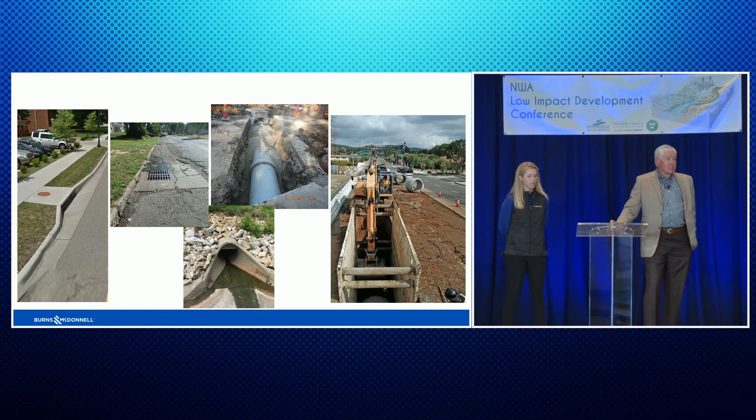Okay, so I'm going to start here with a pictorial tour. Sometimes a lot of our stormwater infrastructure is out of sight and out of mind. This is what we're all talking about - we have a lot of stormwater infrastructure out there, a lot of it out of sight, a lot of it large pipe. Unfortunately, a lot of that large pipe could be corrugated metal pipe that's decaying. There's a lot of infrastructure in the ground in our cities across the country related to stormwater. We also have open channels or streams.

So that's, to me, a really stark difference in how we've invested in some of these neighborhoods - completely different when we look at stormwater management. As we look for the next generation, I know in many of the cities I'm working in, including Kansas City, environmental justice - where we're investing in stormwater - is a real driver for community reinvestment. These are things we need to think about for the next generation.

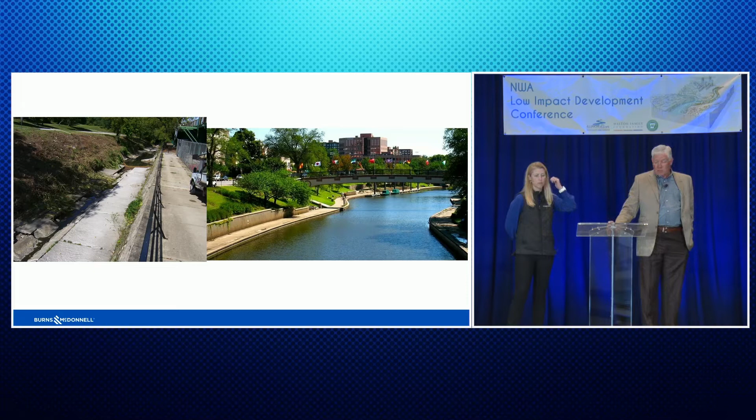And the thing here too, what value, once again, are we getting out of that? If we're going to have the expense of putting in a double box and Mother Nature wants to put it back and sediment in, what's the value again 20 years later? How can we maintain that value for a longer period?

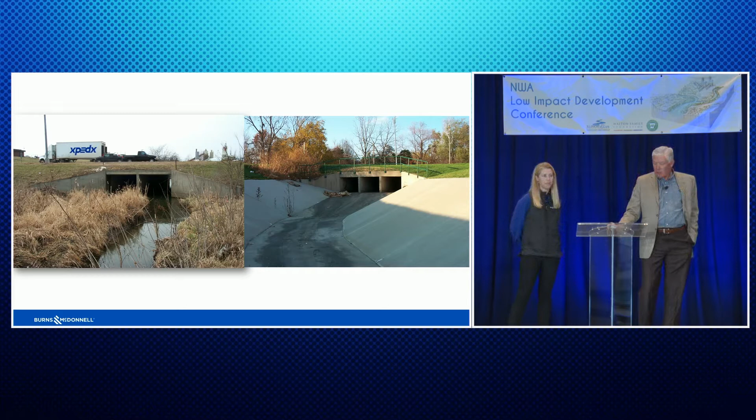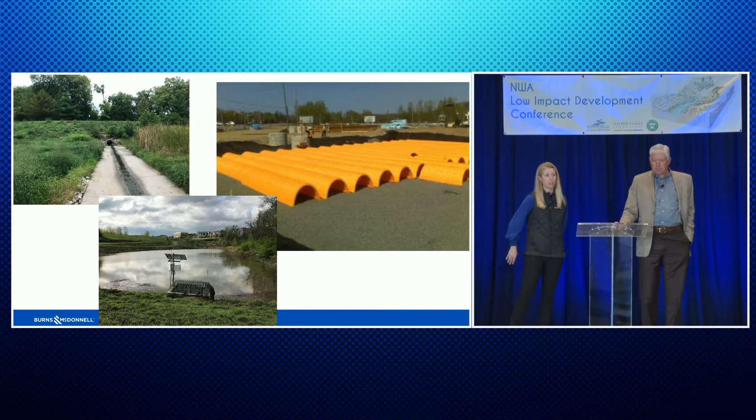So are we keeping track of these systems? Do we know where they're at? I think that's going to be very important as they are going to be critical pieces in our redevelopment over time, where there's not space to do larger stormwater management practices.

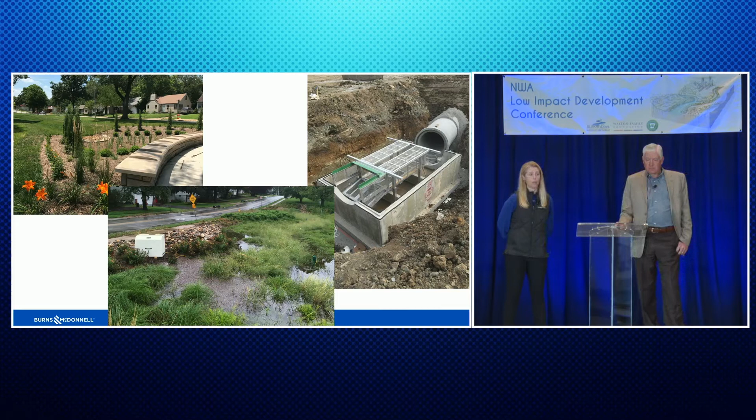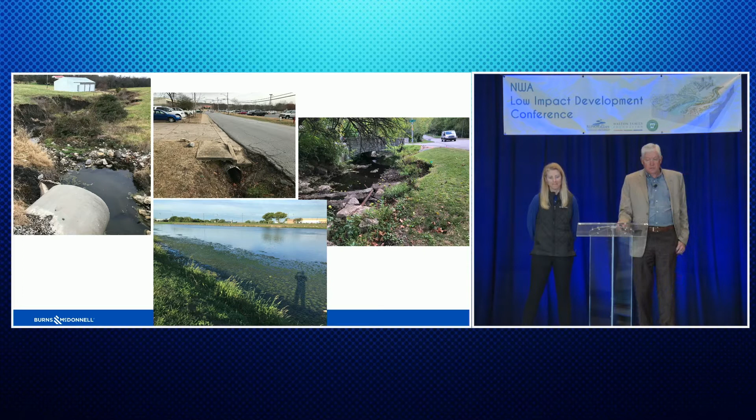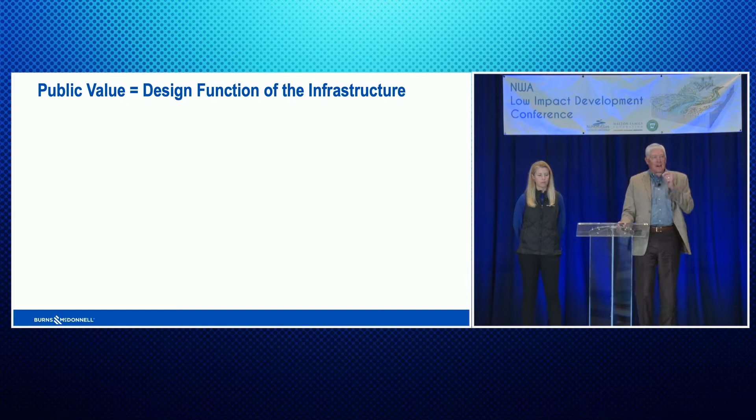What I want to talk about now, you just have that visual of all this infrastructure that's out there, what I want to challenge us with now is, what's that value, what's that function we're providing to the public? Well, coming out of World War II in the 50s and 60s, what did stormwater infrastructure need to do? What was the value we were putting on it?

It was conveyance, right? If anybody's taken an open channel hydraulics class, it's a trapezoid channel. If we put concrete in it, we lower the Manning's n, we can get a very efficient channel. We did a lot of this type of work in the 60s and 70s. That's the main function. Then we started to get into things where we wanted to store it. We wanted to have more retention, detention. So we provided detention ponds, retention ponds. That's a value, right, we're putting on that.

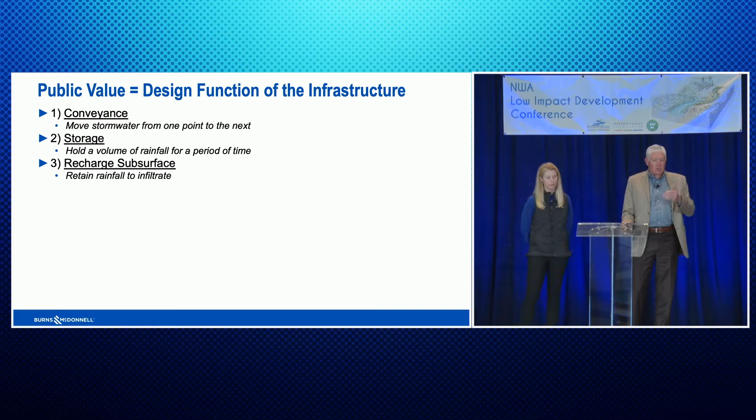And then in some cases we started to do more recharge type subsurface, retain the water long enough so we can infiltrate and those types of things. So we're trying to build, we're adding more value, right? But if we start to think about then, you begin our NPDES programs, now we're doing stormwater treatment. So once again, we're building that value. But I would also say there's other things we can do. The Walmart example is a great example. Can we reuse that water, retain that water for reuse for irrigation?

I mentioned the city of Lenexa, Kansas did a rain-to-recreation project. What they were trying to do is link that to what recreational value can I get out of my stormwater management. But then if we really get outside of our box, what are other multiple functions?

Can your parking lot be a stormwater management facility? Can your street? There's some vendors out there we've worked with that, with different pervious pavements, we can start to make a street a stormwater management facility, right? I mean, these are out-of-the-box ideas, but we're adding value to all these, right?

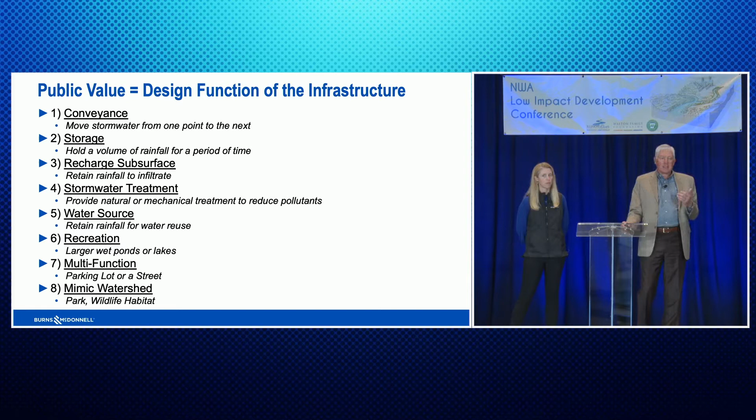And then finally, that mimic, we had a great tour yesterday afternoon. And to me, that is getting back to how can we mimic Mother Nature, make it a watershed, wildlife habitat, all those things. But as we go down this list, can your stormwater management in the future do all these things? That's where we get that increased value, right?

So I was flipping through a journal, and my kids make fun of me because I'm kind of a nerdy person, looking at how we can explain things differently. And I came across just a basic economic little study, and they said, well, this value statement, right? So cost is on the y-axis and value is on the x-axis. And what they talked about in this article is you can divide this basically into 4 quadrants, right?

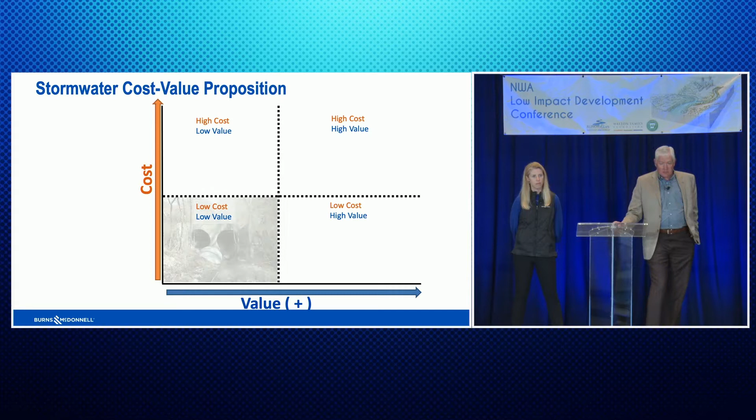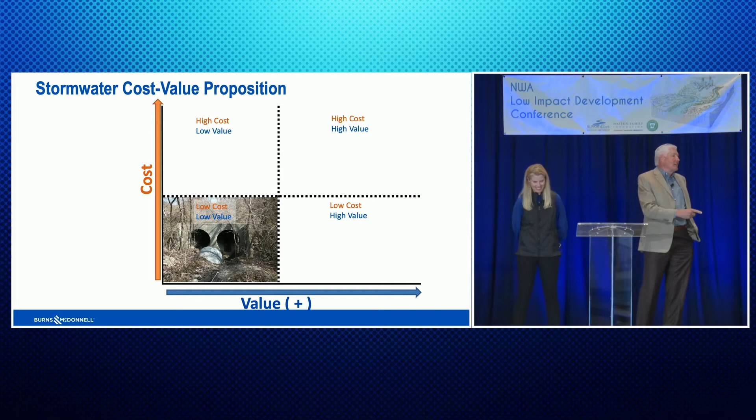And so any type of infrastructure, any type of improvement you're doing, you have these 4 quadrants that you can fall in, right? We can have low cost, low value. What does that look like in stormwater? I see a lot of this out there, right? Hodgepodge of, we do the lowest cost thing we can do, and I got a city engineer sitting over here, and those are things that just happen, right? You have a certain budget, this is what I can get in to help solve the problem.

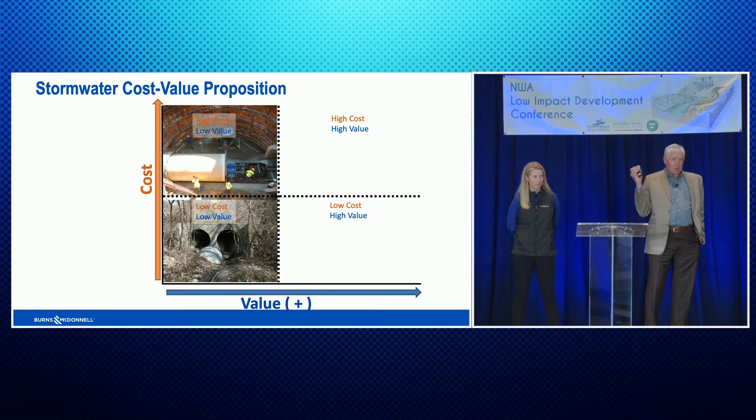By the way, this is also an over $1 million change order and the shoring it took to be able to get the construction workers down in that hole. High cost, very limited value, right? We're just conveying water underneath an existing street.

But then we look over here with a lower cost, high value. At happy hour yesterday, I talked a little bit about this at my table. This is a small town in Missouri, Fulton, Missouri, where the city administrator said there's no way to solve this problem. It was too expensive. And I said to Bill, why do we only have to convey it? You own this parking lot. This is a picture of a parking lot.

We use our tanks, plastic tanks. He has 2.5 acres of impervious area that was draining out to the street, and he only had an 18-inch pipe. He thought he needed to make a bigger pipe. I said, why don't we take your parking lot and put it into your stormwater management, and we use pervious pavement on top of it, which he didn't believe would work, so he tried to go out and flood it with 2 fire trucks. Couldn't flood it, by the way.

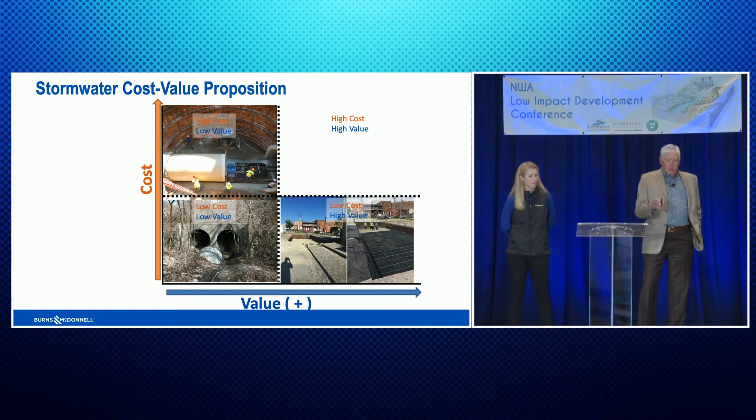But anyway, they did this with city crews, and this was a $32,000 solution. That was the material cost. Of course, with the city labor, it was more than that. It took the city crews about 2 weeks to do this project. But a $32,000 cost to him, because he already had the labor, and we solved the problem. So that's a lower cost, higher value, right?

And then finally, what we saw out here last night, what Brenda and I have been working on in some of these projects, how can we get that? It's a little bit higher cost, but it's a much higher value. Now here's the thing that I see in stormwater that we all have to admit to: some of the things we've done since the 70s actually have a very negative value to the public.

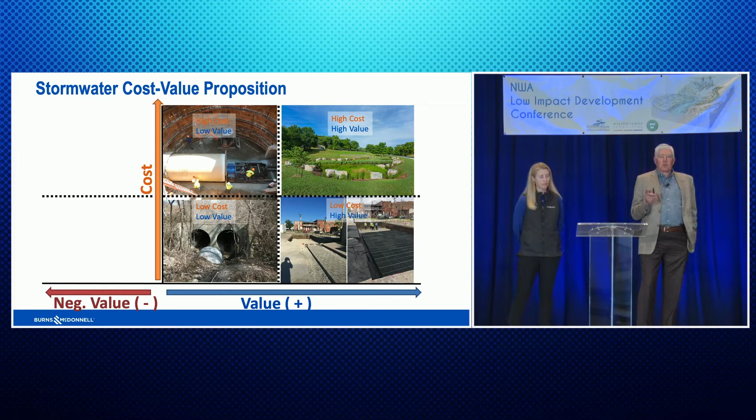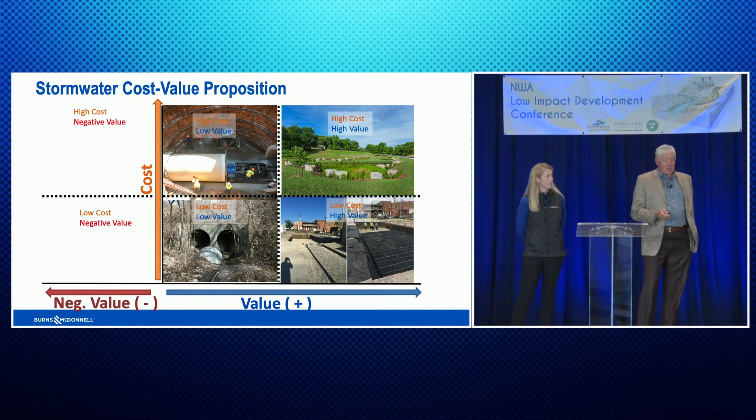And I think when you think about some of the areas in the Illinois River watershed, these are some of the things that you see out there, right? We actually have these low-cost items that are causing a negative value, unfortunately. I showed this picture the other day where a simple extension of a large culvert has ripped this stream apart. Or the high-cost negative value is some of our enclosed systems now that we've connected more impervious area to the top end of them.

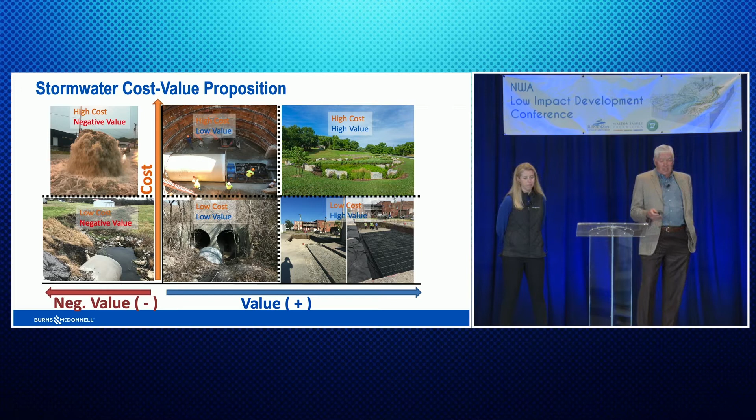Actually, this is in Kansas City, Missouri again, during a 2-inch rainstorm where you're actually getting basically a geyser because you have this large enclosed system, a very high negative value, but a very high cost, right? So with that, what are we trying to do? We don't want to do those things.

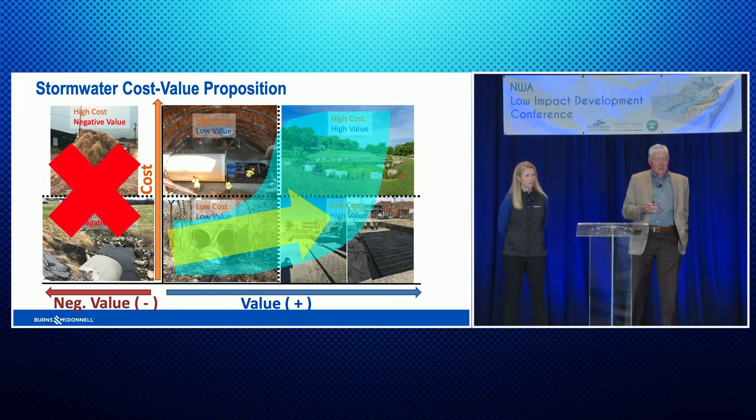What we're trying to do is move ourselves along this curve, right? How do we get from here over to there? That's really what my challenge is for you guys here today. That's the next generation. That's where we want to get to. It's not going to be easy, but we want to get to things that have that higher value. And so we'll talk a little bit how we get there in these next slides.

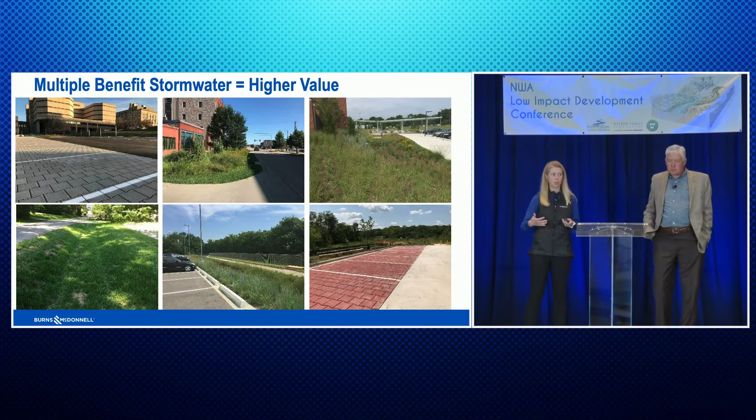Yeah, so looking for opportunities to, again, create that balance. And we started to talk about that yesterday, too. Where are there opportunities where we can layer in stormwater management to other things we want to do on the site? And I think it was Carol had asked, how do we start to make some of these changes? And I think it's really in the way we start to look at a site. So it's designing together as an interdisciplinary team versus in each one of our silos.

So are there opportunities where we can start to increase the value of our existing detention basins? And I know that's a lot of the feedback that I've heard from this group when we've gathered is we have a lot of detention basins that aren't working. Is there a way we can get them working better? Maybe it's retrofitting them with a new outlet structure that controls a range of storm events. Or we're going to talk a little bit about what if we start to automate some of that control?

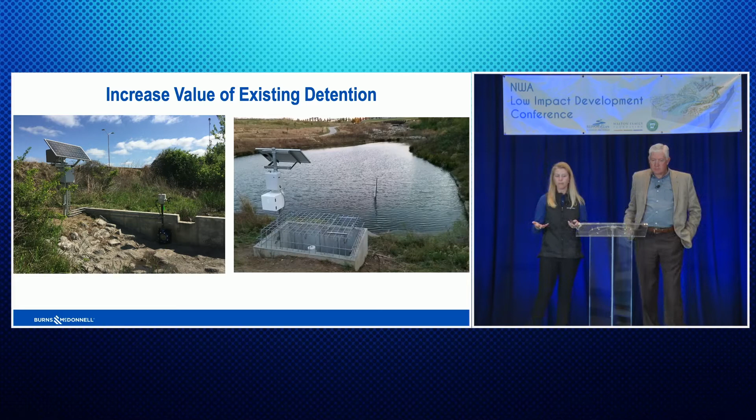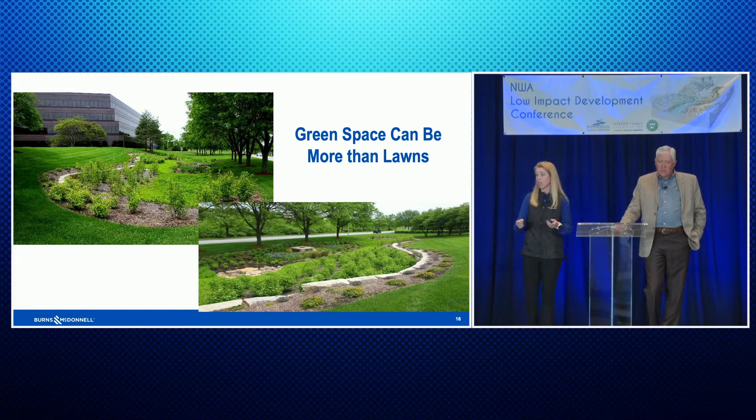We heard a lot about this yesterday, where pipes are being constructed to bypass a lawn area or bypass green space. Are there opportunities where our green space can be more than lawns? And looking for those opportunities even as a retrofit scenario. Collection being more than inlets. I thought it was great to hear that being applied in the Walmart project example that we heard about this morning. So many opportunities to collect stormwater in different ways and have vegetation that uses that stormwater.

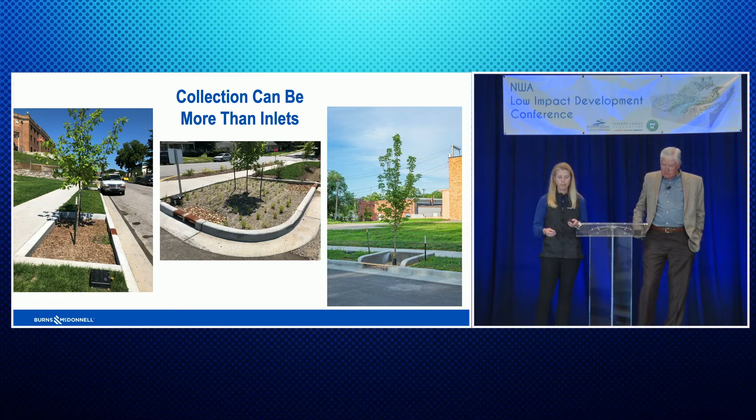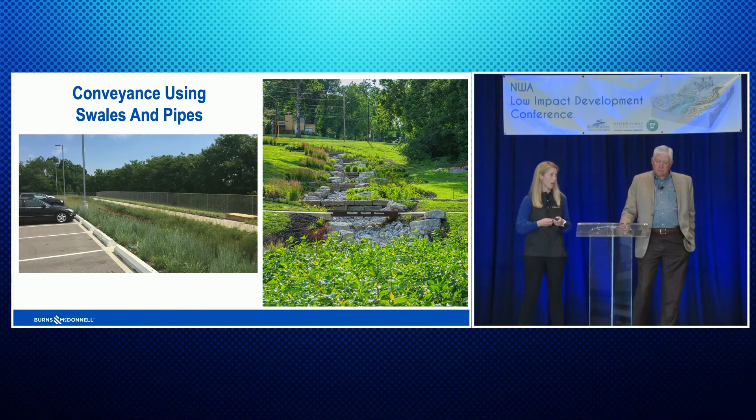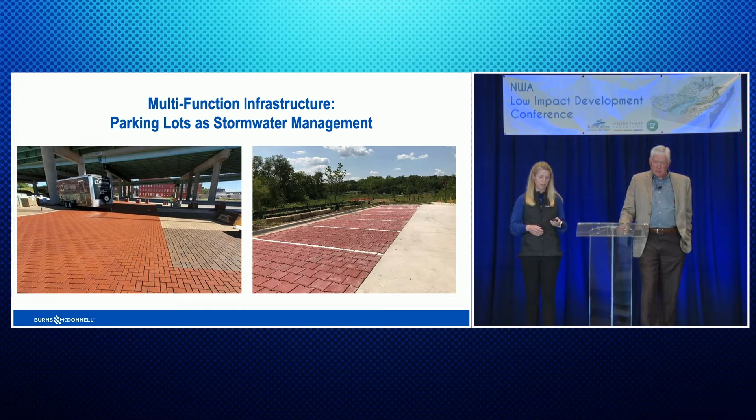Parking lots, lots of opportunities here, whether it's building in median areas or using the parking spaces themselves, depending on the area you're in. This can be ways to reduce your impervious area, or you can build storage underneath it potentially. And a lot of different materials you can use on the surface. A lot of different products out there. Concrete and asphalt are also options as well. So a multitude of options there. That can also be applied to driveway settings too.

So you'll see an application on the right where a product was used that also is providing storage underneath in a very highly impervious setting. This is also in a very highly trafficked area where they're bringing in deliveries, trash trucks. Also, it's a juvenile center, so there's a lot of traffic in and out for inmates.

Do you want to talk any about the? I think I already covered that.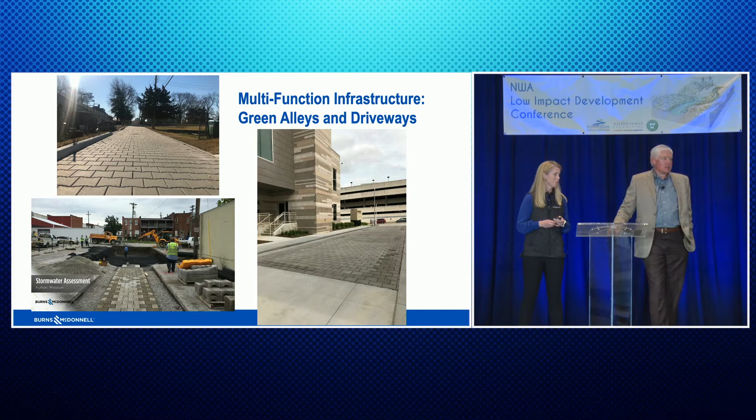Okay. The only thing I'll say about pervious pavements too, we've talked a lot about maintenance, is we've been doing monitoring of pervious pavements, and some of these do degrade pretty quickly on the infiltration rates. So like anything, I think we need to also be prepared that these types of facilities do need maintenance. You do need to vac these out typically to restore that infiltration capacity. So they're not just install them and walk away for 15 years. You're going to have to maintain these facilities to make them function.

The final couple here are projects that Brenda and I get excited about, and you guys in the audience get excited about too, is how do we take some of these larger open spaces, these parks that may not be fully utilized, and turn them into something that has that higher multiple value, multiple function to the public. This was a park that was severely underused, and bringing the public back to it with trails and making it an experience, not just a monoculture of open lawn that wasn't being used for really anything except being mowed.

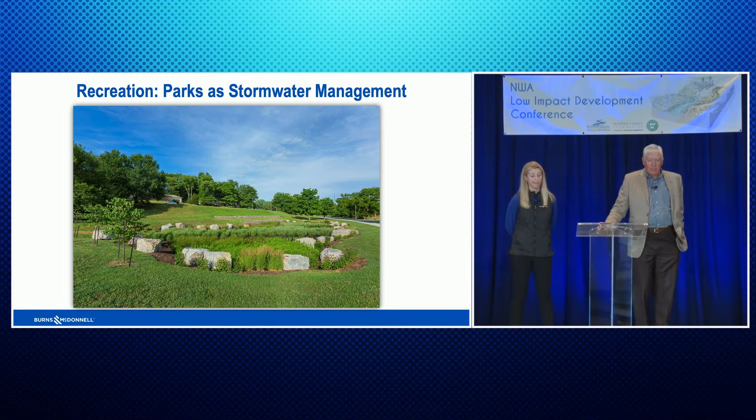The final one is in Omaha, Nebraska - North Omaha. This was a large park area. When I first looked at it, there were 3 baseball fields here, and I thought the parks director would never want to do this, but they actually had a master plan with the community around it, and the community wanted a larger park setting similar to what we have out here. This is a 5-acre wetland complex that also provides 100-year flood protection for the downstream community that was in the 100-year floodplain. So there are opportunities in these highly urbanized areas - this is just north of downtown Omaha. There are areas out there that we can find these opportunities to stack those benefits and increase the value of our stormwater management systems.

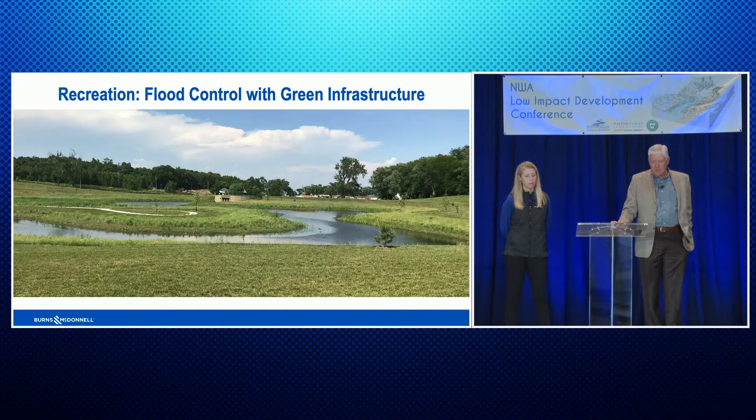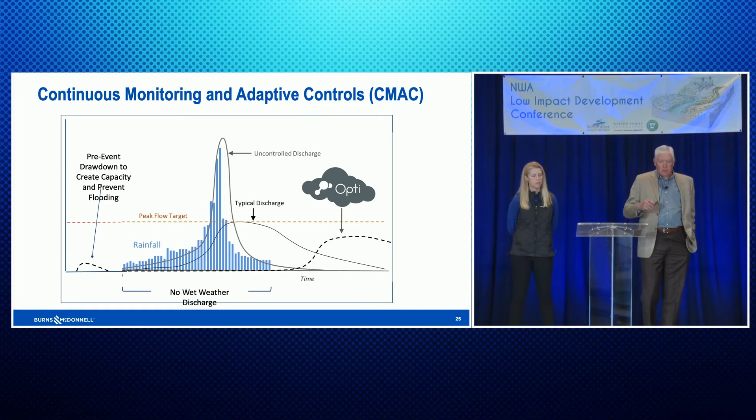So let's talk a little bit about some smarter solutions. Since it was mentioned this morning by Ted, this is RTC out of Boston, a really interesting company that's using cloud-based technology and the NOAA forecasting to, in real time, open and close a valve. It's trying to predict in real time, every couple minutes, what the NOAA forecast is going to do, and then it's going to open and control a valve so that we can maximize the retention in these existing facilities.

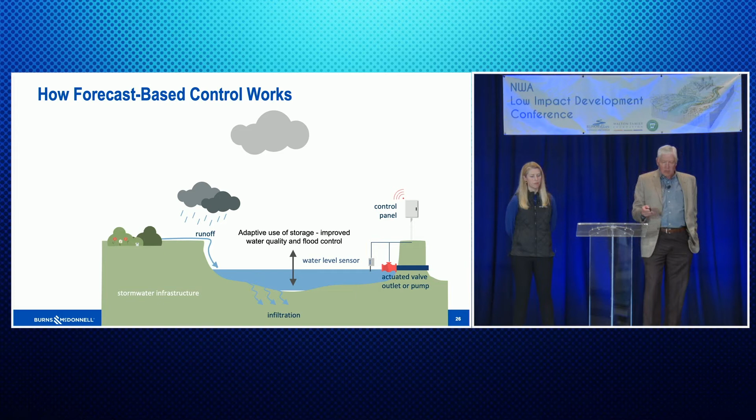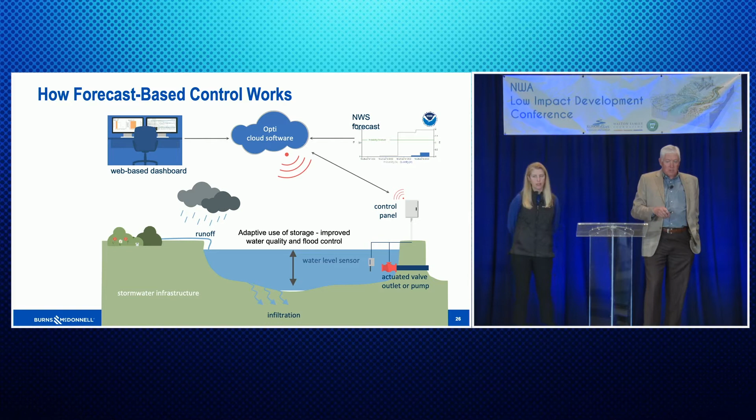Here it is pictorially, showing what it's doing. In a typical wet pond, you get runoff, and the pipe leading out of it would, after the rain stops, drain the water down to where the pipe invert's at. So it's a passive system - it just drains out based on the hydraulics of the pipe. But what if we went in there and put a valve on that pipe, with controls to that valve, and then monitored the water level in the pond so we know how much volume we have, and also monitor the rain forecast? This is what Opti basically provides in the cloud - it's automatic. There's no operator here except the computer, which has logic to it that you enter based on the NOAA weather forecast, and it operates that valve. So it keeps that valve closed now because it knows the rain event's over, and I can maximize my retention.

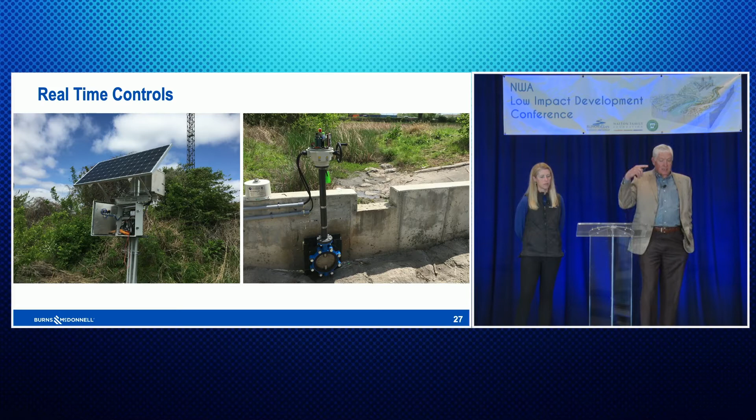What that looks like on a couple sites we've worked on is basically an 8-inch valve that has a solenoid on top of it with an actuator, and then a solar panel gives it energy with some marine batteries, and it has cellular technology that communicates both ways from the control panel. This is the facility looking upstream - a 2-acre dry detention pond in a very highly industrial area that wasn't getting much value.

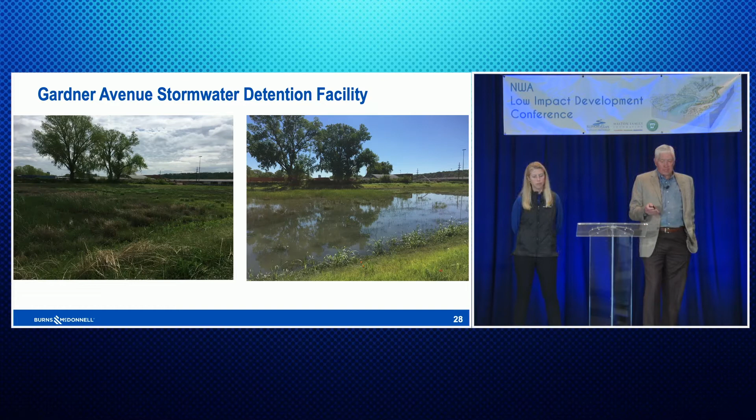On an annual basis, this is what we're seeing. In 2017 into 2018, we controlled 98% of all runoff volume. This is just a retrofit - a less than $100,000 retrofit - once again increasing that value. In 2018 we had total retention of almost 90%, 88%, and we increased the retention time for water quality benefits by almost 40 hours of everything that's being held. So once again, it's a way to quickly increase the value of an existing system.

A lot of dry detention facilities are out there. If you're a city official, those are some pretty low-hanging fruits. If you can just think about how to use technology like this or even retrofit them with different types of outlet structures to increase that value, you're getting more stormwater capture.

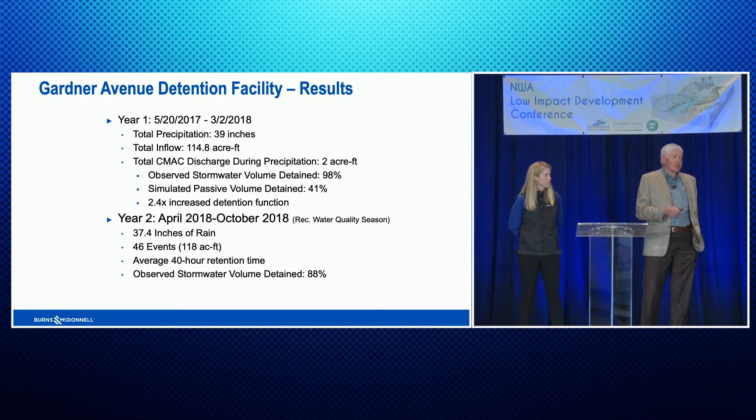To add on to what Andy said, another impact of that facility now holding water is we've been monitoring the vegetation there, working with a landscape architect who's noticing very diverse species. It's turned into this wetland meadow, really cool to see it transposed with the introduction of a lot more water over time. We're getting different species in there now.

So as we look at infrastructure of the future, a lot of this is going to be retrofit situations, or we need to think about our redevelopment areas. We can't depend on just including green infrastructure and other practices on our new development.

One way we can look at this is through thinking about our infrastructure in zones of a watershed. So what makes sense in, say, the lower zone of your watershed, shown in light blue here. To me, this is a place where I'm going to try to preserve that area, set it back. Even if I get that opportunity in redevelopment, I don't want to build a building necessarily in this area.

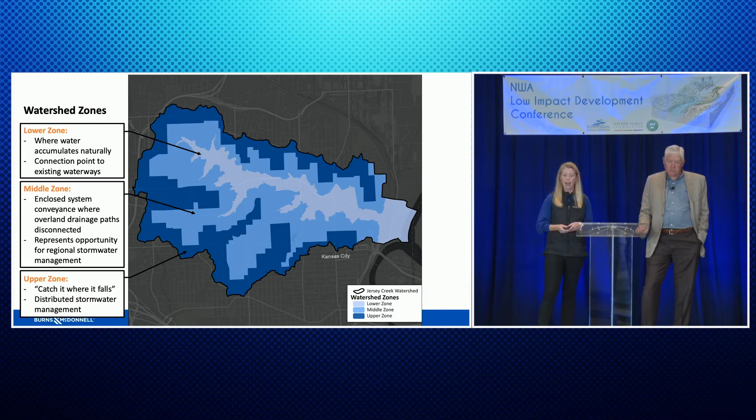These are really our opportunities, I think, in our redevelopment scenarios. So what can this look like? On the right side, we took one of the sub-watersheds within this larger watershed and started to dive in to see what stormwater infrastructure could look like through these watershed zones.

I'll move from the bottom to the top. So we've got our upper zone. We are defining some enclosed system that we need just to help us route the water along the overland flow paths to capture it—it's a very urban area. But we've also got a mix of different detention practices and retention practices.

As we move into that middle zone, we have an opportunity for more of a green street type scenario where they can define parking areas through maybe some type of pervious pavement. But we also have a unique situation where there's an existing pond in the middle of the sub-watershed, and it's actually in the perfect area for a retrofit situation where we can bring stormwater there and use it.

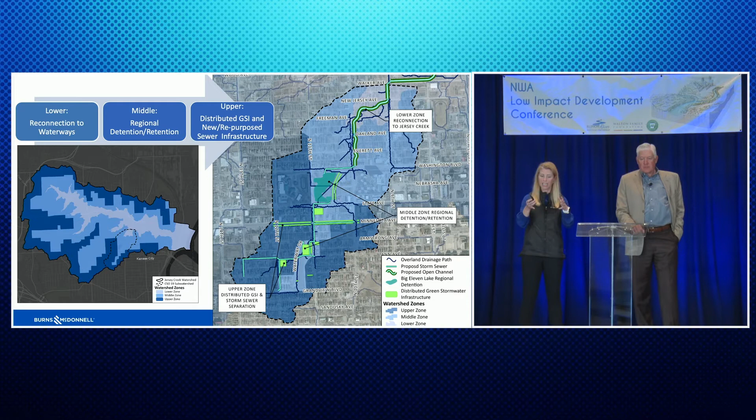Now, as we move into that lower portion, it gets pretty interesting because our flow paths kind of congregate together, and this is where there's some redevelopment opportunities. So if we dive in here a little bit, this is looking just at that lower zone. I've overlaid those overland flow paths with what I would typically apply as a setback.

So more of a traditional stream setback. If I had room, this is what I would want—I wouldn't want to develop in this area. You'll see there's parcels outlined there. So this is an existing residential area.

If I start to overlay the data that I have, just that city data that's out there, these are all of the land bank properties that are currently not owned by a private landholder. So it's a very disinvested neighborhood here we're talking about, so a lot of vacancies.

And so trying to say, if we want to redevelop this, what's a better way to do it, basically, is what we're looking at here. So once again, use that opportunity for vacant lots as an opportunity to bring stormwater management back in here, something that makes a higher value to this community.

And when you start to look at the vacant and the land bank lots, to me, maybe one of the reasons these are vacant is because they were flooding at some point in time. The water was moving over the land and didn't have anywhere to go.

The community really wants trails in this area too. And ultimately, they're trying to provide a connection, and they're thinking trails, to a creek, an existing creek, Jersey Creek, that's shown at the top right. But notice we don't have a path for the water to get to Jersey Creek right now either. So that's a problem. We have a whole sub-watershed that can't even get to the creek.

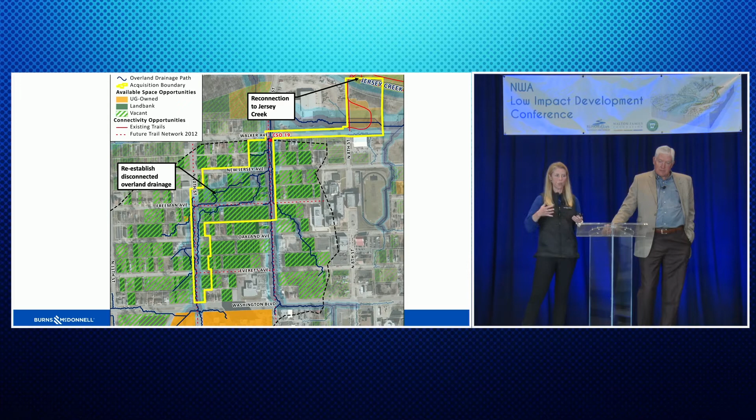So we started to identify that we wanted to make what's outlined in yellow as our stormwater management area. So that would be the area we would be looking at stormwater first and redeveloping around that area.

So taking all those off, this is what that could look like, okay? So you can see where we could look at doing a proposed open channel, connecting that with some culverts where we need road crossings, and ultimately getting that channel to Jersey Creek.

We can integrate trails with this new connection that starts to provide connectivity for the neighborhood. They could use this potentially as a pocket park or add a trail to get to Jersey Creek, and then look at trails to move upstream even in the watershed.

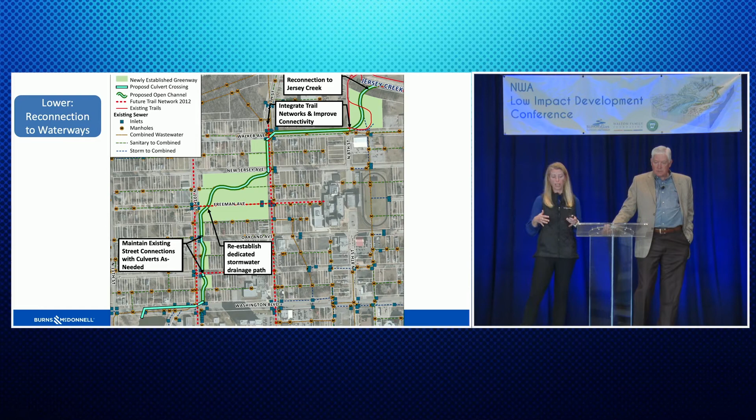As we move through here too, the other important thing that the client wanted to look at was how does this impact existing infrastructure in the sub-watershed? So there's existing street systems, there's a lot of old inlets, old manholes, old systems that aren't being used because there is so much vacancy in the area.

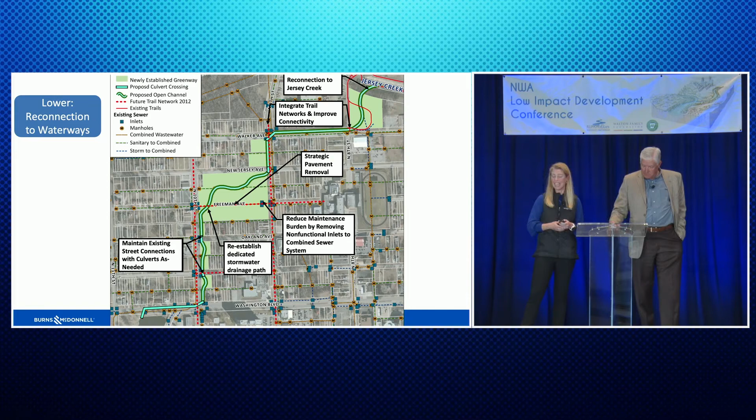So there are opportunities to remove some of that pavement, take some of that impervious area off, and take out some of the infrastructure that's not functioning. And then ultimately, we can redevelop in all those vacant areas that are yellow and use that bright green greenway area as our focal point to develop around. This is something to keep in mind as you're starting to redevelop.

Look at the bigger picture, zoom out, see what's going on in the area. Are there opportunities to combine parcels? And maybe there's reasons those parcels are vacant.

Right, so I was thinking about this, so why don't we do more of this, right? Well, stole the thunder, sorry, I clicked the button. No, just kidding.

A lot of it that I've been working with, and I know people in this room are working on this, what are our design standards? What are our criteria? Right now, a lot of our design criteria, unfortunately, are barriers to some of the stuff that we just showed you here today.

So how do we start to update those standards? Well, first of all, we need to know why those standards were developed. And if you don't know why, a lot of the stormwater design standards really came out of the Corps of Engineers Civil Works. Cities have adopted those, and with these rainfall patterns and intensities, we tend to over-design with the conservatism that a Corps of Engineers should be designing for, but they're designing levees and dams.

Once again, we're designing pipe systems. Do we need to have that same level of conservatism in there? Or are there better ways to maybe right-size our pipes? Those objectives before were more about routing water, right? These old design standards were more about peak flow, mitigating risk upstream to downstream.

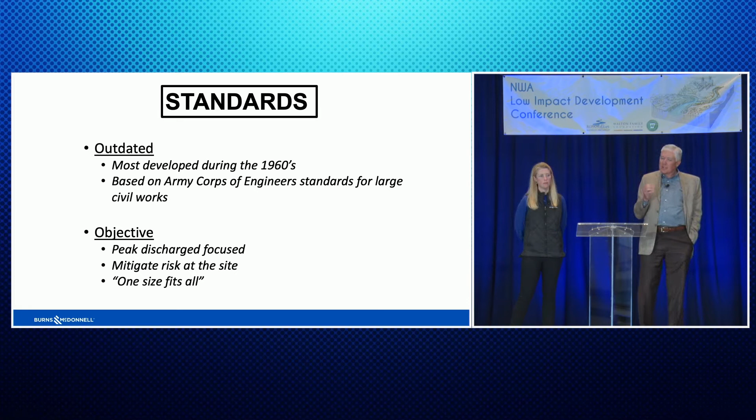And typically it's more one size fits all. A lot of stormwater standards, there's not a lot of flexibility, right? You're doing that. So we need to think a little outside the box if we want to improve that. And that means updating standards.

It also means that we need to—and I know this is a crazy idea for some people—we're only focusing on those large, less frequent events. By doing that, we've painted ourselves into a corner with less creativity.

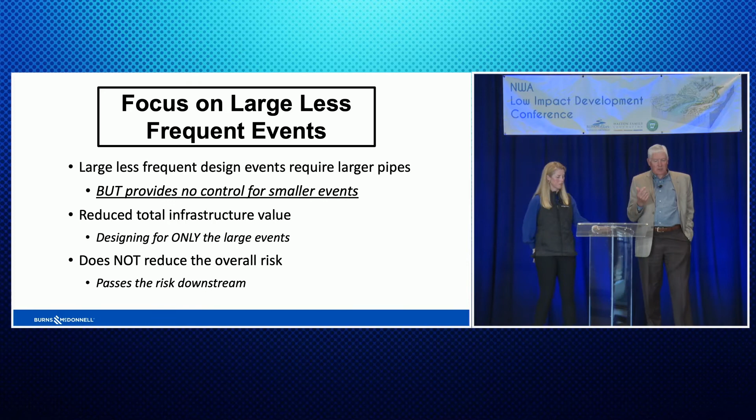We're really looking at large pipes, but does that provide the value? They're not controlling any of the smaller events. The streams are seeing all those small events, and we'll talk about this in a second. We're trying to reduce total infrastructure value by designing only to those larger events. So that's one of the things we need to be doing.

Education, I think, is a huge piece of this puzzle. A lot of times we think that just putting out one training and having that available online meets the education need. We need to understand why we do the design the way we do.

I think it's important for the general public to understand this too, because if we understand why, we're more likely to be open to change and to look at what infrastructure could be versus what it is today. And it's hard.

I didn't know if the mini wheats thing would work yesterday, guys. I didn't know, and maybe it didn't, but we've seen it referenced a few times through the conference. It's about making communication and education intentional, trying new things, and continuing to try.

Ultimately, I think we need our infrastructure—and this is not just stormwater infrastructure—to figure out that balance between performance and cost. Think about this in all the infrastructure we design and build. We've got to figure out the increase to community benefit long term, and that's with redevelopment also. Those are our opportunities, because we're not going to touch that infrastructure for probably another 50 to 100 years.

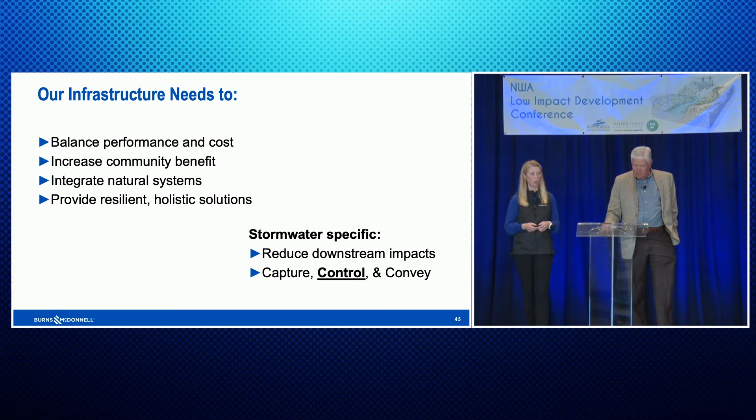So in conclusion here, we have a few slides to walk through our process, or where we need to go. Part of that we've talked about, and I'm going to go through these quickly because I know lunch is almost here and you guys are probably getting hungry. Looking at multiple different events, not just one event, I think is important.

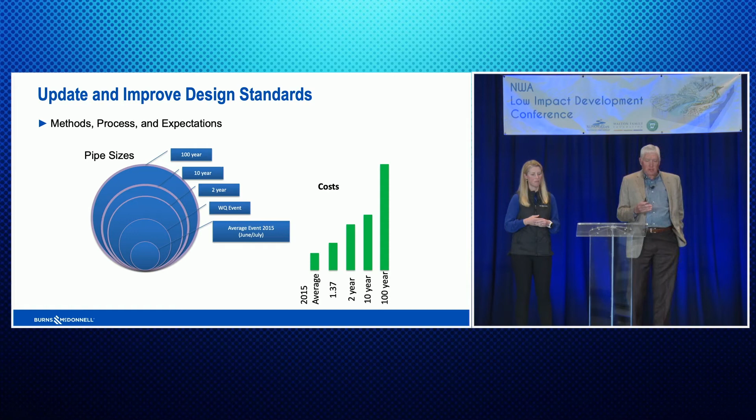Thinking about how that impacts your costs, especially the amount of gray infrastructure you need. I think it's important to look not only at design event storms through Atlas 14, which I'll talk a bit about, but also at this—Bentonville's rainfall data for the last 36 years of 1-hour total rain. A lot of the events, 90 to 95%, for 1-hour totals are 1.4 to 1.8 inches. So are we really developing infrastructure that's maximizing on that knee of the curve of actual rainfall?

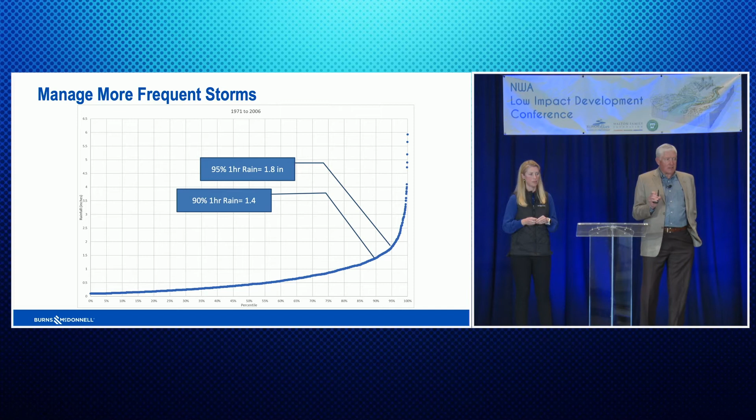So there's that balance again I think we need to consider. We also need to think about how standards impact us. This is, once again, a very simple example, but hopefully it's a way to educate.

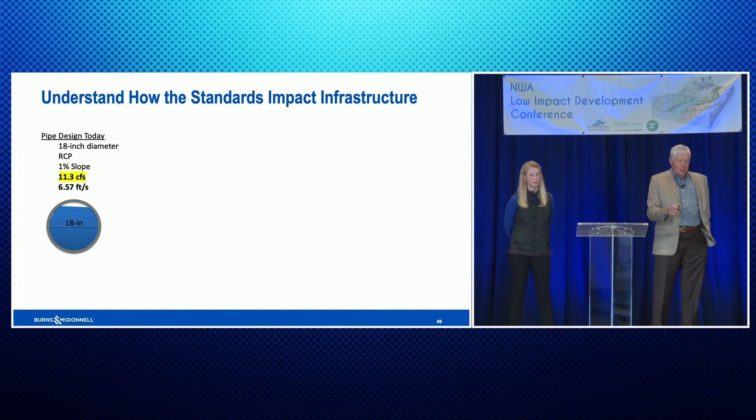This is what we're saying when we just do one rational calculation with one intensity: this is what we're supposed to be paying for. I want an 18-inch pipe because it's going to be flowing this full, right? Have you ever thought about what it's doing when it's not full? And that's 80, 90% of the time.

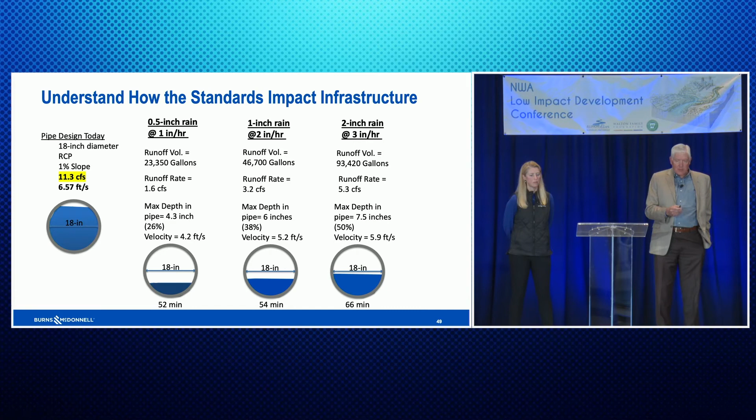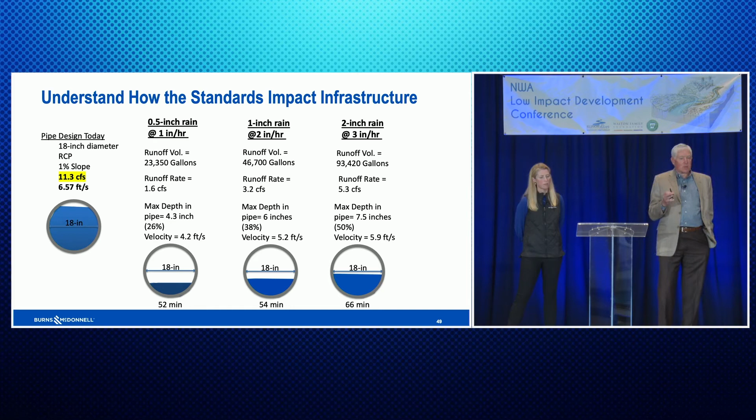When I get a half inch of rain and it only rains an inch an hour, that 18-inch pipe I pay for, I'm using very little of it. I only have 4 inches of water in it. If I double the rainfall intensity and volume, I still only have about 6 inches in it. And if I double things again as far as volume, it's only half full. So when we do design standards, could we design to the median value and maximize use of this pipe more? Because I'm reserving a lot of space in this pipe for a very intense event that may happen later. If we think about this in a systems evaluation, is that the best solution, is all I'm saying.

And then the existing stormwater detention - I have a whole other presentation on detention, I'll get on my soapbox here for just 2 minutes. I see a lot of these detention facilities, and here's my challenge to everybody that has dry detention facilities in your neighborhoods: if you can mow your dry detention facility, it's not working properly. You're not getting much value out of that, because we put in concrete aprons to make sure we route the flows right through it.

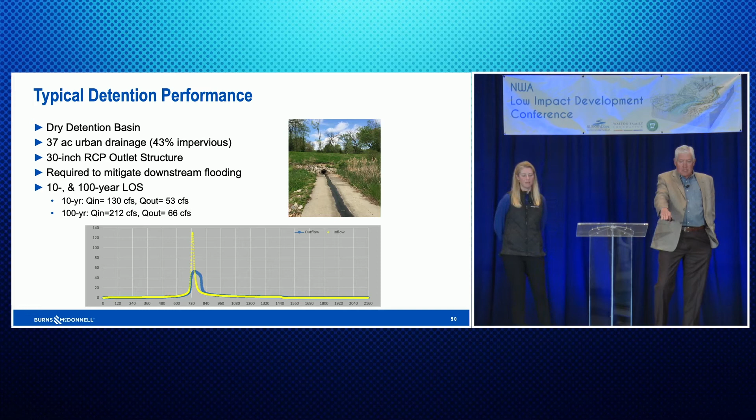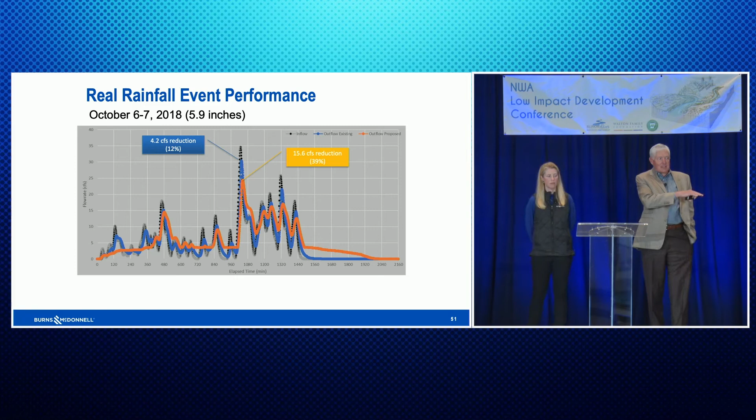So what we're paying for is the hydrograph down below. We have a CFS in this case coming into this facility for a 10-year event of 130 CFS, and it's supposed to knock that peak off down to 53 CFS. What happens when it actually rains? This is the flooding event that happened that we mentioned the other day in Kansas City. The blue line is how it actually functions - it only reduced the peak flow of this actual event 4.2 CFS. This is a 10-year, a very large event. If we retrofit this, I can get almost 40% by adding something like Opti or something else, so I've now increased that value for that facility. So think about your detention facilities that are out there - are they functioning like that hypothetical design event? Are you getting full value out of that, is what I'm saying.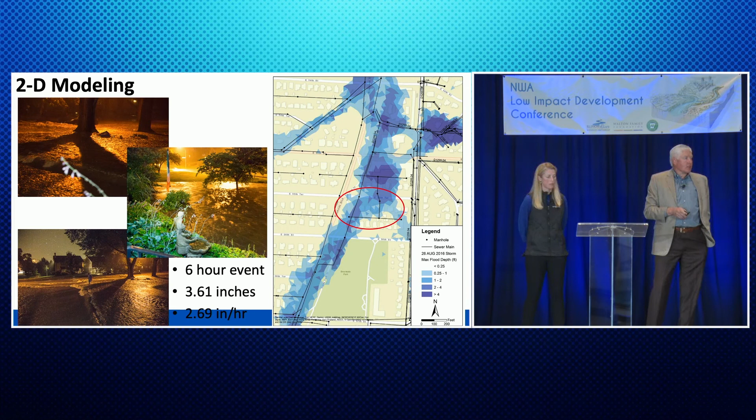Models have come a long way. A lot of cities have detailed LiDAR. I've been doing a lot more 2D continuous simulation models - really helps you understand the enclosed system as well as the overland flow path. This particular watershed, we were able to reduce the overall cost of this project by $12 million by doing some continuous 2D modeling, because we right-sized the pipe and reconnected overland flow paths for those larger events. Instead of a $40 million solution, this is now budgeted at less than $30 million, basically $28 million. So these larger infrastructure projects, take the time, make the investment - 2D modeling does help you extensively, because a lot of stormwater issues are not 1D. We have pipe flow going that way and overland flow might be going that way, and you really need to understand that in these urban systems.

And then finally, I'll turn it back over to Brenda here in a second. NOAA Atlas 14 has some great resources in there. Don't just look at the 10%, they're giving you all these frequencies, all these probabilities. Use this as a resource to look at what fits my community and my level of service - it doesn't just have to be one.

So on that top graph, like I mentioned yesterday, that's the first quartile - the first quartile is where they have more data on. These are 6-hour durations, they'll give you the 90% probability, which is the green line, or the 10%. 10% is typically where we're designing larger flood control. What if I want to use the median value? That's the purple line - maybe that makes my pipe size a little bit smaller, maybe I can then reduce my cost without reducing my level of service. Think about those types of things when you're using Atlas 14.

There's a lot of information in there - a great way to get your standards updated using a national reference like this.

So I think if we're going to start looking at standards and revising, we need to understand the limitations of our existing toolbox. This is something I'm passionate about because a lot of times I see very complicated requirements for what's required as a designer for me to submit just to put an inlet in. And I know that there's no model out there that actually models an inlet, and I know what each one of these variables is now doing.

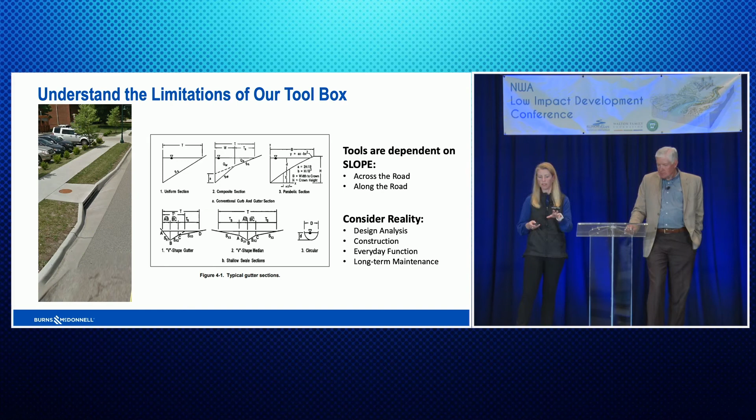Oh, went the wrong way.

Let's go this way. Back to the education, communication. This needs to be intentional and with everyone that is working on a project. So a couple aspects to this. We have some great design manuals out there that get us through those design plans. We need to make sure we have the tools out there that the contractor can actually take those design plans and build it. Does he have all the information needed to actually build what you have on the design plans, the specifications? Are the materials available in your area to build what you need to build?

Also, it's not just about holding one pre-construction meeting, okay? I see this a lot. They're like, okay, Brenda, you designed this. You need to be at the pre-construction meeting to tell the contractor all about this design. Okay. Then I get a call, okay, Brenda, you need to come out on site, because these folks that were down there installing this tree planter weren't at the pre-construction meeting, right? So communication is ongoing, and I think we need to incorporate our designers throughout that construction process too, to be communicating with the folks that are actually putting in the material.

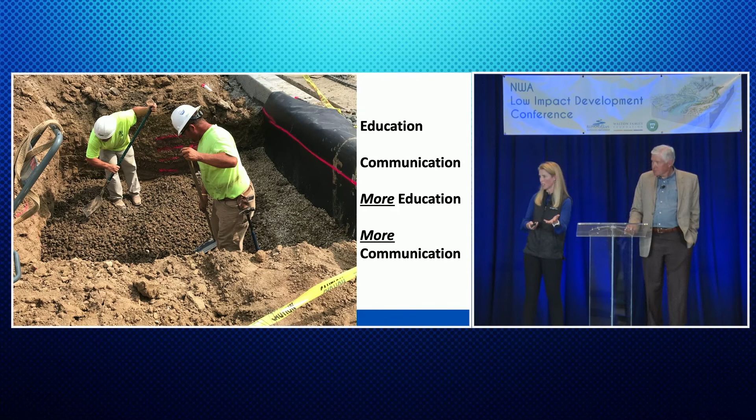In this case, once they understood the function, what we were building here, they wanted to do everything to protect these facilities and build it right. This is actually a structural soil that they were putting in. We had thunderheads rolling in to the west. We knew it was going to rain. So we scurried around on the site to protect these. They knew it was important to protect them or they were going to have to take out all this material that they had just placed. They protected them. You can see the silt buildup that happened during that rain event. Good job. And to this day, we have very functional tree planters that are functioning as inlets on this street. They're working great.

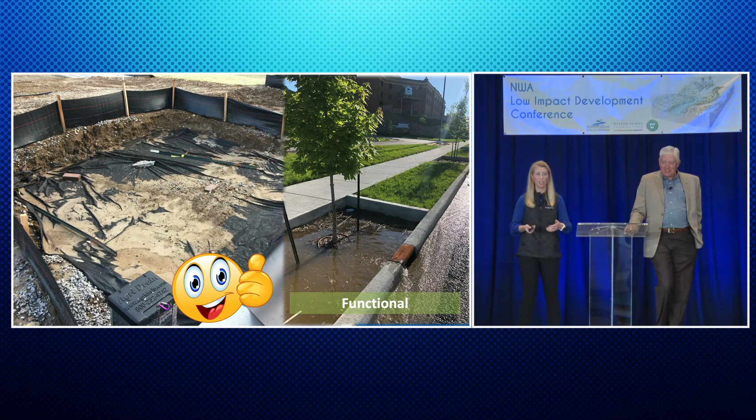Same project, different subcontractor. This subcontractor was not at the pre-construction meeting either, had a lot of communication issues. We were calling them to see when they were going to be out on site. We could never get a good schedule. And so this was not inspected as it was put in the ground. A lot of ponded water. We scraped off the aggregate that was on top. It was a landscaping aggregate on top. And we found a film.

And what had happened is the aggregate was not clean. It was not double washed. And so all of those fines had washed down and accumulated on our growing layer, the media layer, shown on the right-hand side. We just scraped that off, and the water went right down into the system. So you can see how just a small material issue can cause a big problem on a site.

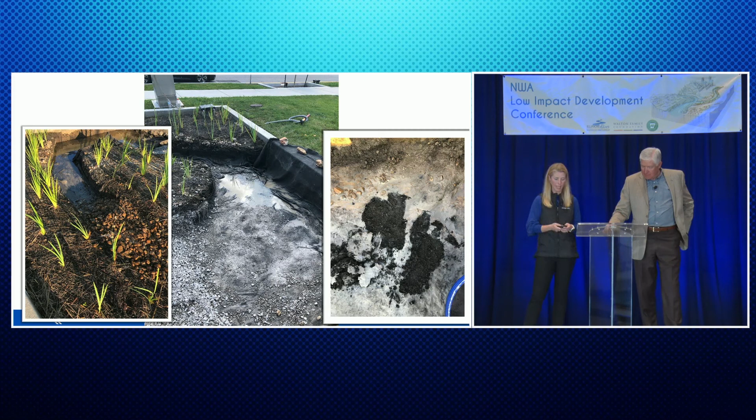I think a big challenge, and this is a whole other topic, is asset management. So Paul, you talked about this this morning related to Metro. I see a lot of cities struggling with this on the stormwater side, even not knowing where all their inlets and pipes are to that degree. How are they going to know where our green infrastructure facilities are, our stormwater control measures, where it's at, who's taking care of it, how to take care of it, especially on our private facilities that maybe change hands. We need to think about better communication tools, I think globally, and education tools as well.

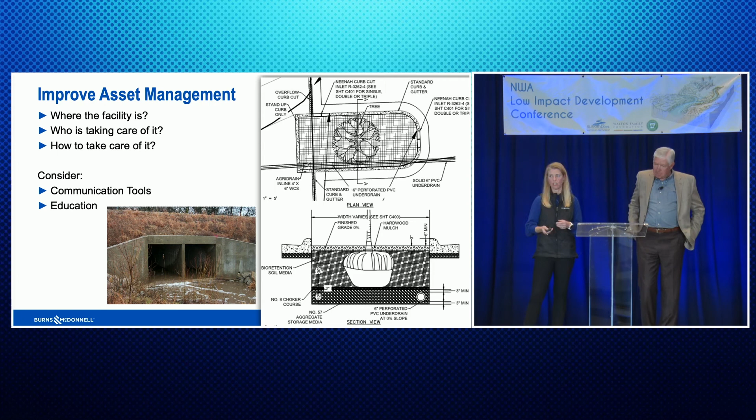And so in wrapping up here with a few slides, we talked about this with the Walmart site. Interdisciplinary design teams, I think, are important to make these things look beautiful so they're a community benefit. Next slide. We can also have more innovative designs.

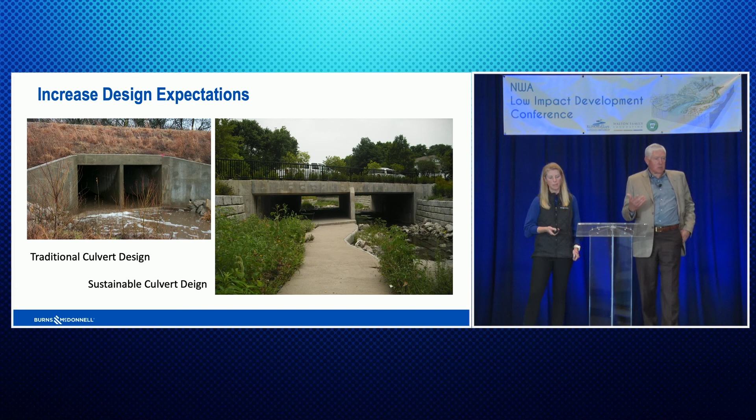The Kansas City Metro chapter of APWA has this. This is a conservation culvert on the right. So we can put back culverts more like Mother Nature. Once again, there's more value in that. That's something we can be doing. We can start being more adaptive of integrating designs that integrate into the neighborhood instead of just being these ugly trash detention type facilities only.

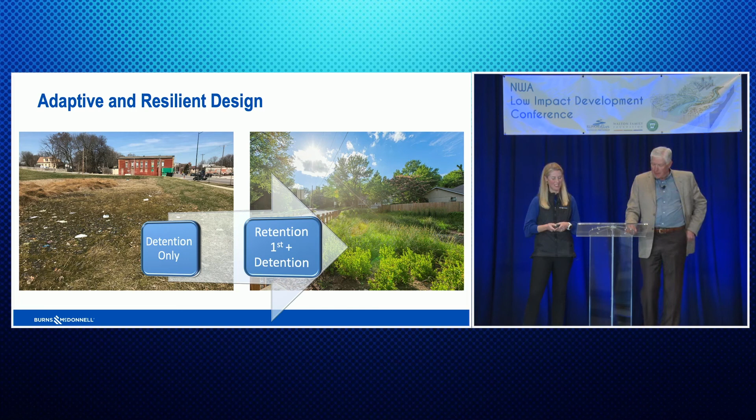And then we can also, I think, structure our solutions more on where they are at in the watershed. There's opportunities there. So think about our larger, even more flood control facilities at the lower part of the watershed. Look at opportunities for more regional detention versus having detention on every development lot. Look at that in the middle part of our watersheds. And then really looking at the top of our watersheds. Are there places where we can capture that rainfall before we even get it to the system?

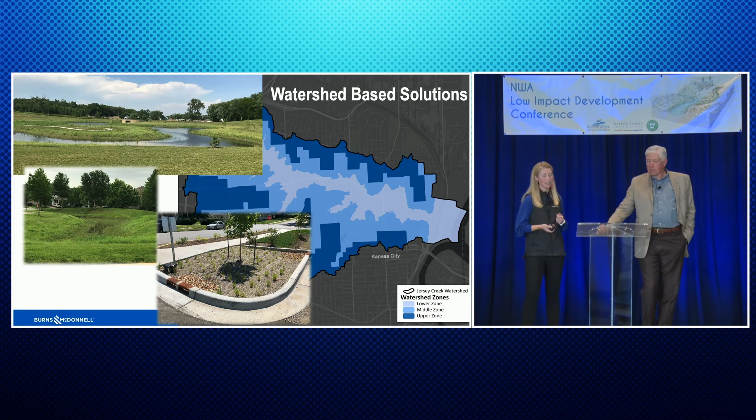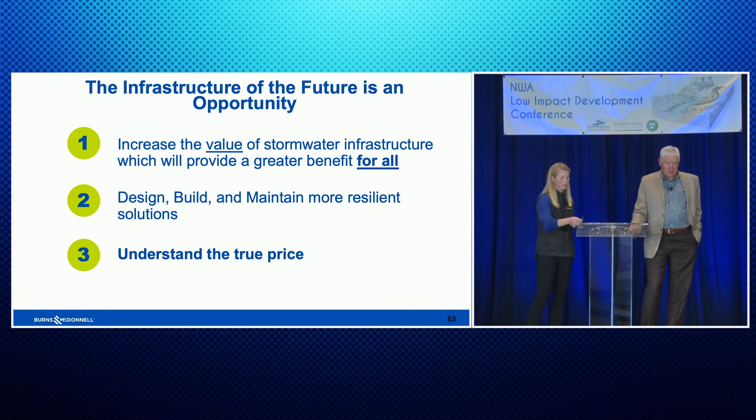Right. And so just in closing here, like I mentioned at the beginning, we really want to increase that value for the benefit of all. We want to design and build and think about that maintain for more resilient solutions. And Brenda had some great examples there. And then it really gets down to, what is that total price that you have, including that maintenance. So all things just to think about.

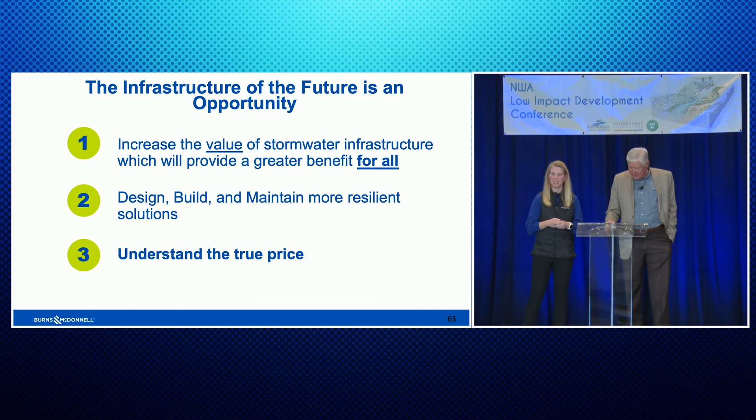I found it really interesting, you talked about stacking benefits and watershed zones. I think it's something we all need to think about in Northwest Arkansas particularly. I think it's a real opportunity as we urbanize and develop, and I know a lot in the room are actually already thinking about it, but really interesting presentation.